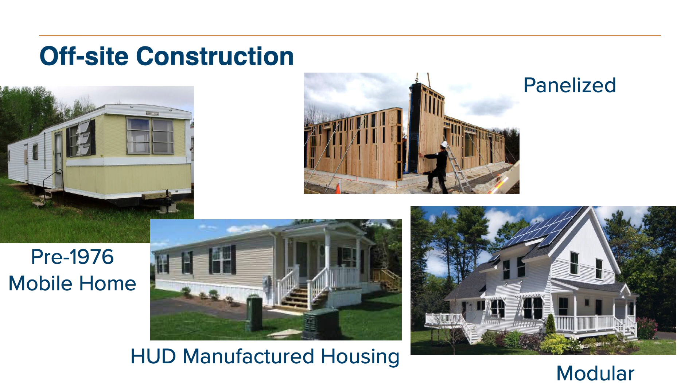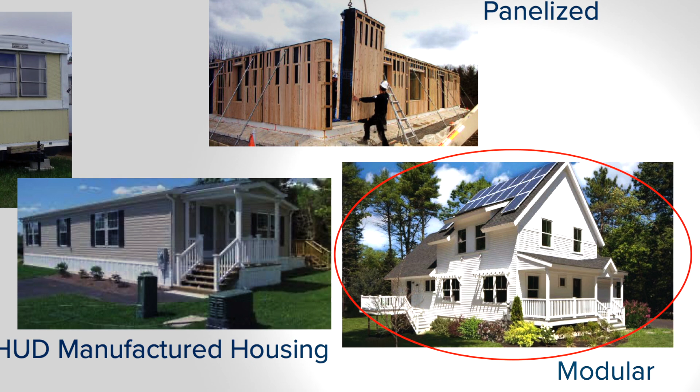You see 4 images on this page depicting kind of that traditional pre-1976 mobile home, and then in 1976 the transition to that HUD manufactured housing home, panelized and modular. So modular is that home on the bottom right-hand corner. That's one of our earlier homes, and as you can see, obviously it has all the appearances of being a standard single-family home. That is also the case for its mode of construction. So that's modular.

And then to just drill down a little bit on that, really, as the name suggests, a traditional home is essentially segmented into individual boxes. So this is volumetric modular as opposed to panelized, where the shell of the home is built off-site and then brought on-site in a flat pack model. These are homes that are essentially fully built off-site but segmented such that they can be shipped over the road and then brought onto site and assembled into a full home.

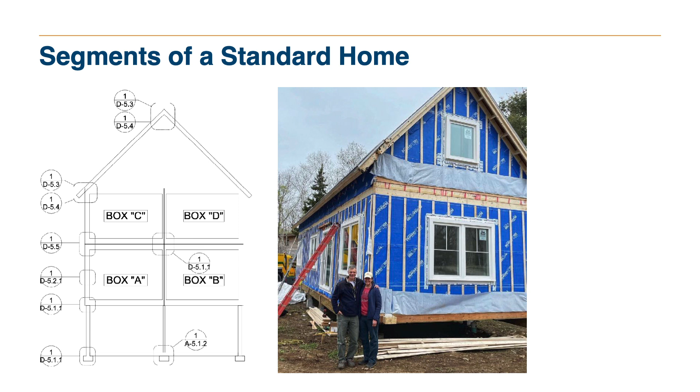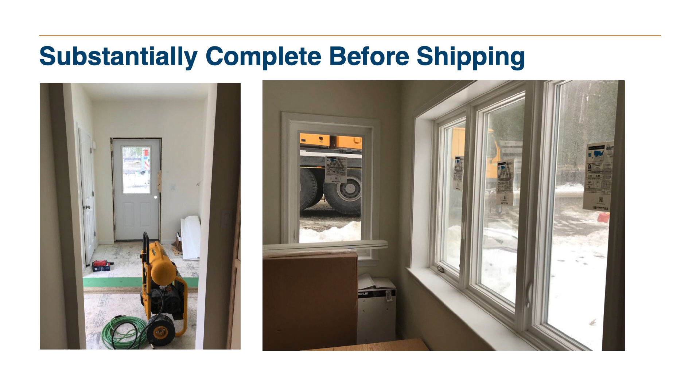So clearly one of the really significant advantages to modular construction is that you have substantial completion before it ever even arrives on site. You have a home that has all the sheetrock, has all of its plumbing and electrical systems roughed in, all the window trim installed and painted, all the windows obviously installed, interior doors installed with interior trim, and essentially all of the paint throughout the house up to basically a primer coat or a complete solid white. Likewise, you also have all the kitchen cabinetry installed. You might have kitchen countertops installed, sinks, all the plumbing, bathroom fixtures, etc.

So you can get upwards of 70 to 90% completed structure delivered to the site from the factory. So all of that takes place undercover, in shelter, in a climate-controlled environment. What that also means is that you have shorter overall time on site.

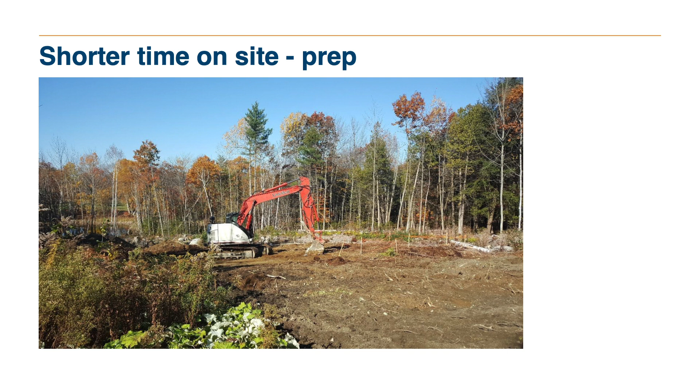So while things are being constructed in the factory, the general contractor can be working on site, excavating, clearing, putting in the septic system, putting in the well, and doing all of that stuff that typically in construction is a linear process of sequencing one after the other. This can then happen concurrently. So your house is getting framed, roughed in, painted, trimmed, etc., while you're digging a hole in the ground and putting in the foundation.

And then, as I mentioned earlier, when those modules get delivered on site, they get set with a crane, and you go from an open foundation to a fully weather-tight, weathered-in, weatherproof home in one day. So it's a pretty phenomenal thing to see these homes come together and to recognize that you're going from a very exposed site to a fully enclosed structure in that single day.

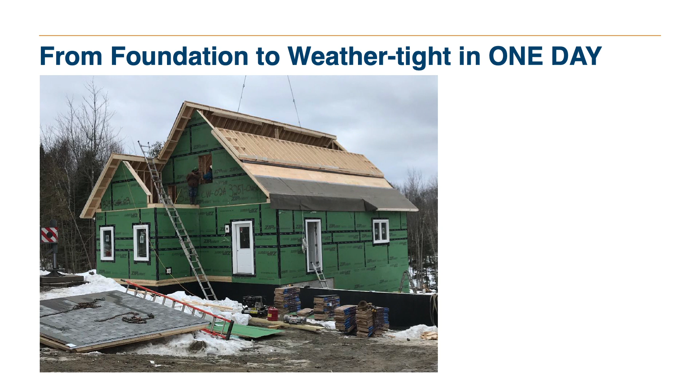Certainly the general contractors and their teams and the subs love it because they don't have months of exposed studs, exposed components to that weather. And you can see in this image, this was a midwinter set. And so they went from pretty cold conditions to what could be a heated space in a single day.

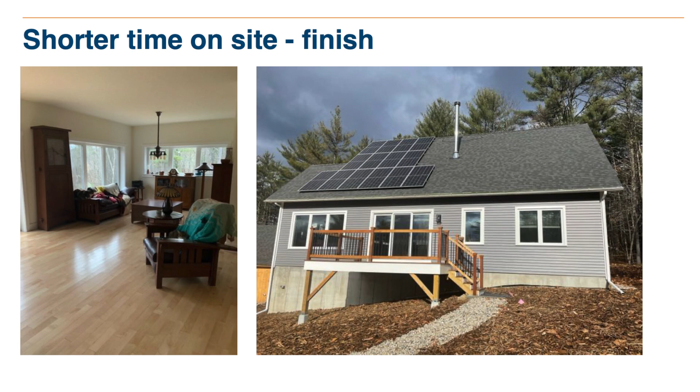And then, of course, because you're having a house that's arriving substantially complete, you have a much shorter time on site in the aftermath with the finish out. So finishes, flooring, in most cases countertops, any tile. You're doing a lot of surface finishes, and you may be building some of the outdoor components, the decks, porches, etc. But you're really starting from a much, much further advanced level of completion. So it shortens that time as well.

So I'll talk a few minutes now about project delivery. At BrightBuilt, every homeowner that we work with has a team of at least 3, sometimes 4. Sometimes 4 is the interior designer. That's a little bit dependent on the individual client. But we have a project pilot who is the primary interface with the homeowner, primary communications manager. The architectural designer handles the design, and a construction liaison works with the general contractor and the manufacturer to keep the lines of communication open and ensure that the house is being built to our performance spec.

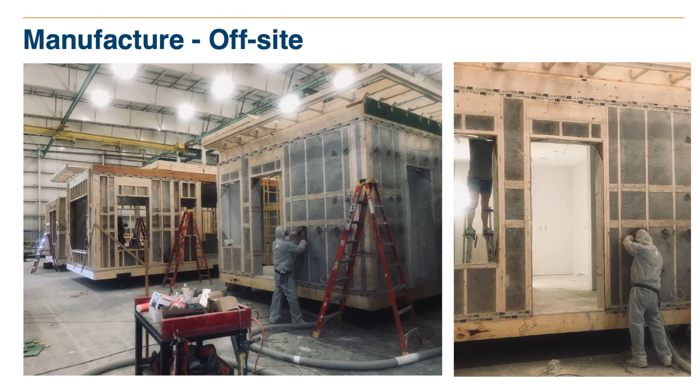The design I've already spoken to, but essentially we start from either one of those known starting points in our portfolio or from scratch and work with clients to design the home they're looking to do. And then we go into the off-site manufacturing. So this is the piece I'm getting at a lot today, which is really that undercover, climate-controlled environment. You can see here we have the components of the house coming together in these images. The exterior walls are getting their dense packed insulation. We do a 10-inch double stud wall in our homes using either dense packed cellulose or dense packed timber fill. We're really focusing on that performance spec and taking advantage of that climate-controlled environment. So then the finishing touches happen after the modules arrive on site.

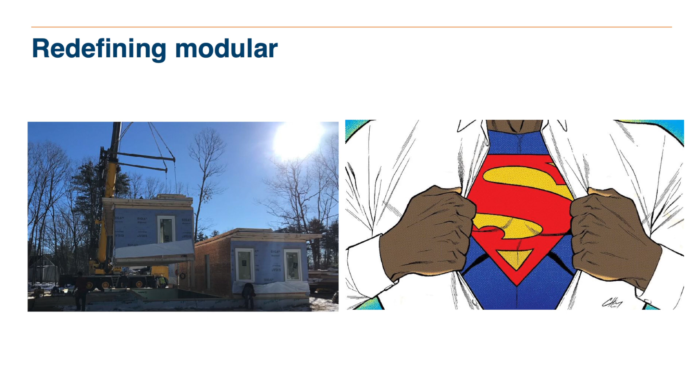So, obviously, I think modular over the years, for various reasons, has a little bit of a reputation or a stigma with low quality. So sometimes we get asked, well, how can you make modular high performance? The image I showed a couple slides ago, that's one example. So here we're taking advantage of this existing infrastructure where you have standard practices of construction. We're still building with stud walls, with wood components, in the same essential foundational manner as you see in modular manufacturers, but we're looking for advanced specifications. We're basically starting from first principles of building science in terms of the different things that we're looking to achieve with our homes.

So we're really aiming at leveraging building science and bringing it into this existing infrastructure of the offsite manufacturing industry. So we want a better envelope. Like I said earlier, we've got deep, dense packed cellulose. So we're looking for a nominal R40. It's very derivative from the pretty good house principles, if you're familiar with those. And we're also looking to manage airflow and vapor in this wall assembly. So we have a vapor retarder on the inside face, and we use a vapor open membrane on the outside.

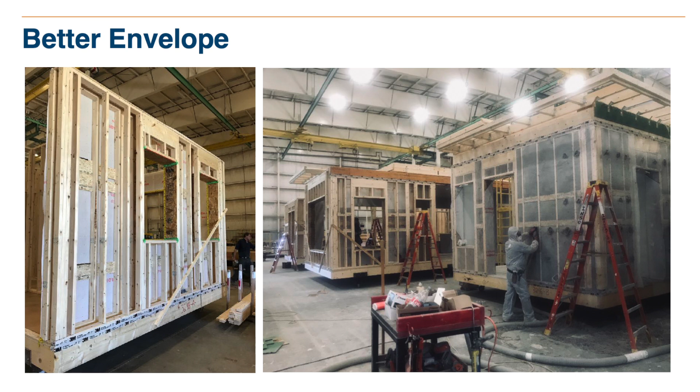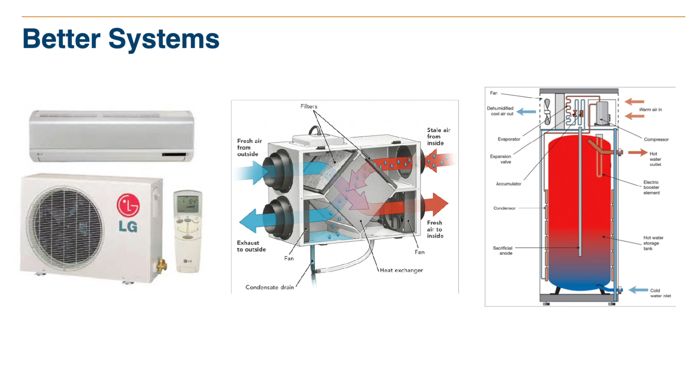We also have really energy efficient mechanical systems. So this is a really key component to home performance. You want to make sure you have managed ventilation, outside air coming in pre-warmed, pre-filtered, bringing fresh air into the space, and then stale air being extracted. So it's a really important piece of high performance construction. And then for the hot water components, we tap that same technology that's used for the heating and cooling in the air source heat pumps and use heat pump hot water heaters as well.

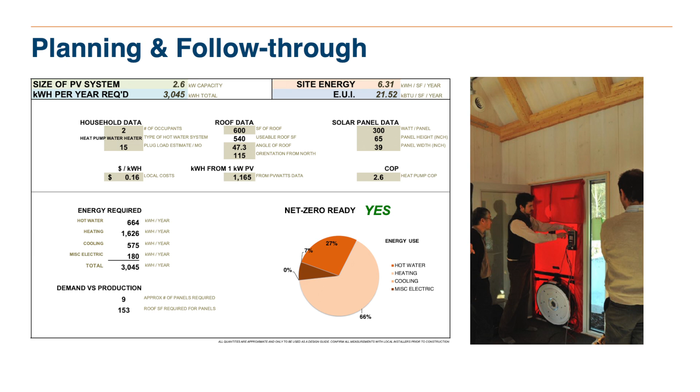That keeps all of the systems running really efficiently. I'm going to start moving faster because I'm running out of time. So better windows and doors, and then planning and follow through. So we run energy models for all of our homes and then run blower door tests for verification of performance.

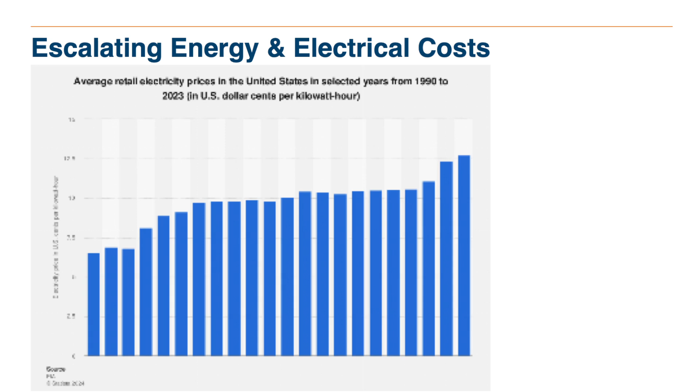So a couple quick slides. This is probably a little bit preaching to the choir in this room, but what are the reasons for striving for net zero? One is escalating energy costs. This is a graph of electrical costs from 1990 to 2023. You can see that continued climb. And then pair that with the decreasing cost of solar. So solar being a technology, it continues to be more cost effective and more cost efficient. So those two together make a lot of sense for going net zero.

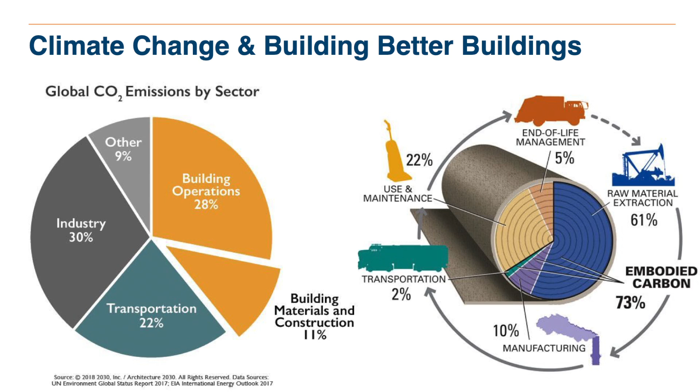This is another sort of foundational or ethical reason why to pursue high performance, of just how much carbon emissions are involved in the building industry as well as embodied carbon. I'm going to run through these really quickly as I'm running out of time, but I wanted to do a couple case studies on our homes just to do a little bit of a compare and contrast between a higher end home and a more compact, cost efficient home as examples, and show the specs of the home.

So this example is a 28 by 48 foot home. It's about 2,400 square feet, has 3 bedrooms, 2 baths, lofted living area, covered entry, open back deck, and a walkout basement with a partial finish. The timeline for this home was about 5 months in design, 3 months in production and site prep, so that concurrent time that I was talking about earlier, where you can truncate the overall construction time, and then roughly 5 months for on-site completion, systems installed, finishes, etc.

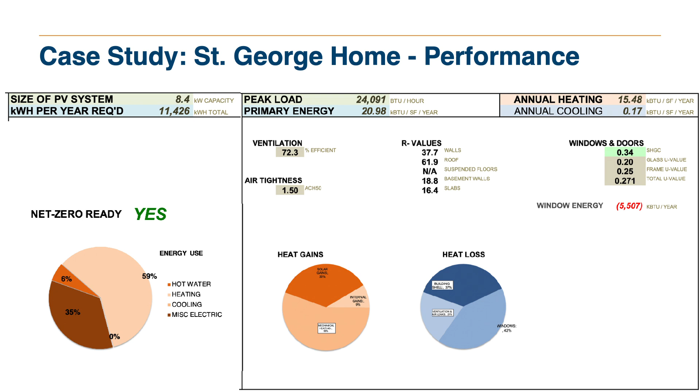And then this is the energy model for that home. So you can see the different components we're exploring here. We're plugging in all of the values of the systems that we're using and evaluating the performance of the home to determine what the peak load is. You can see it in the middle there on the top. So that helps inform the sizing of the energy systems, heating and cooling systems, and you can also see the size of the PV system that we're recommending for this home.

This other case study then is that smaller home. This is an 18 by 48 foot footprint with a vaulted space, 1,200 square feet of finished living space. It was a main floor with a loft, 3 bedrooms, 2 baths, a walkout basement with a covered porch, and it had a solar shed for the solar power. This had a somewhat similar timeline, 4 months in design, 3 months in production and site prep, and 5 months of on-site completion. And then here again is the energy model workup that we did.

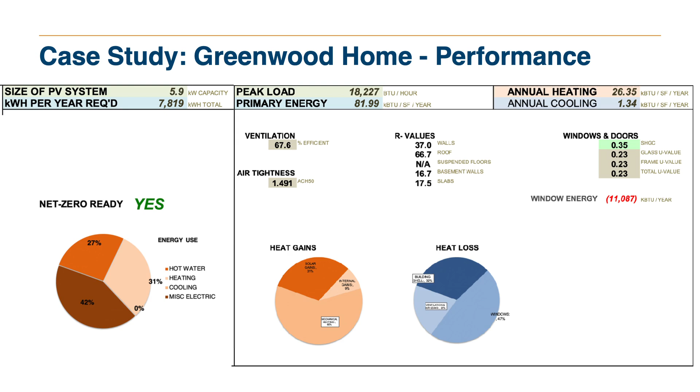This one obviously requires a smaller sized PV array, smaller home, smaller footprint, smaller loads. It's got a smaller peak load. Also, if you look at that window energy in the bottom right, you can see that number's red. That's because this house actually had an easterly facing orientation as opposed to what we typically try to do with a due south orientation, which would definitely help the window energy and the solar heat gain. This is also why this had a solar shed, because the orientation of the house didn't support solar as readily. So that's what we aim to do, and that's how we're leveraging modular specifically to be high performance.